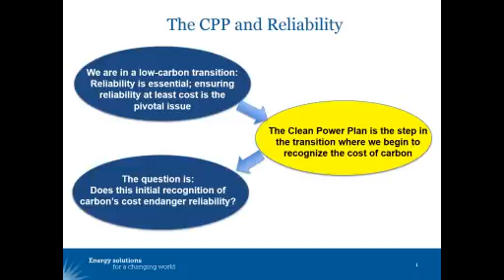This is Christopher James with the Regulatory Assistance Project. Carl Linvill, also a principal, will be the presenter for today's webinar on countering the reliability card.

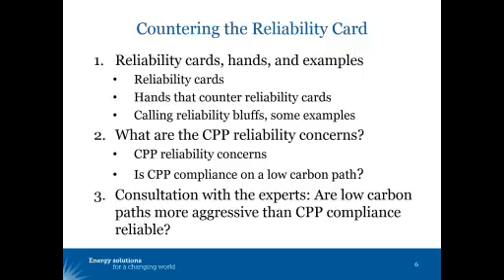So first, to step back on reliability, I like this slide a lot, and I hope you'll hang on to it and use it. One of the first challenges you face when somebody plays a reliability card is, well, what do they really mean by reliability? Some people will claim that closing a power plant or some number of power plants compromises reliability in and of itself. Well, that's not per se a reliability issue.

Reliability issues are things like, is the supply adequate to meet demand? Those are adequacy concerns. Does the system operate well under normal operating conditions? Is it able to adjust supply and demand to keep balance and keep frequency in normal operating conditions? And does it respond really well when a disturbance hits the system?

If reliability is protected under all three of those circumstances, as being adequate for planning purposes, as operating reliably in normal operating conditions, and in meeting those disturbances in unusual conditions where stress is placed upon the system, then that system is said to be reliable.

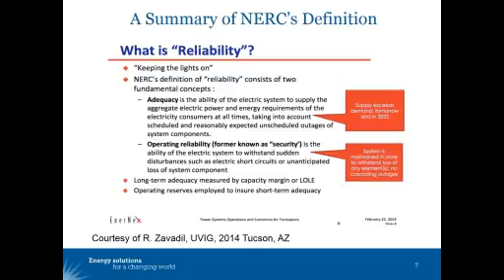So I have these things listed here on this slide. I just want to point out that this grouping of things was recommended by Brian Parsons, formerly with National Renewable Energy Lab and now with Western Grid Group. And there's some really fine presentations by Debra Lew, also formerly with NREL, now with General Electric, that you can find on the Western Interstate website. And I will post how you get to those after this presentation.

So the first step in countering a reliability card is figuring out what card is being played and getting specific about that. The second piece in countering the reliability card is to think about what hands you have that may be appropriate for countering the card being played. It depends on the resources available. It depends on the flexibility that already exists in the electric system. It depends upon what changes in operational practices can be feasibly implemented.

But no matter what location you're in, it's almost surely true that there are a number of hands that can be played. There's one point I want to make at this point. I'm giving you a broad overview. Different electric systems in the country are different, and a necessary part of countering the reliability card well and figuring out what hand to play in your region is to get to know your friendly local electric engineer and system planners. There's some good people in every location around the country that can help you to interpret this stuff for your specific circumstances.

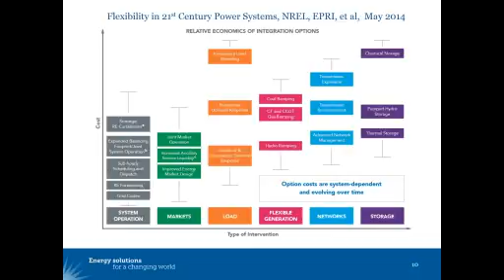We certainly will do our best as well, but at the end of the day, one of the most effective things that I've seen utilities do is take advantage of a lack of knowledge of their specific system by a technical expert. And so vetting what you plan to say and what you're going to do with someone who really knows your electric system well is a really good thing to do.

So there's this nice chart. There have been many things like this that have been created over the last several years. This one was taken from a publication called Flexibility in the 21st Century Power System from last year. It's an NREL publication. I included it partly because it's notable that a co-author on this is EPRI, who has good credentials on the utility side of the community. So I think it's a good one to pull out to show the range of tools that are in the toolbox.

There are tools here, system operation tools, tools that relate to the supply side, both fossil resource tools as well as renewable energy, large-scale renewable energy tools. And then, of course, there's the customer side, the customer resource side of tools that are available, like demand response, local storage, local generation, things like that. There's also changes in market design that can be useful. So there's a wide range of tools.

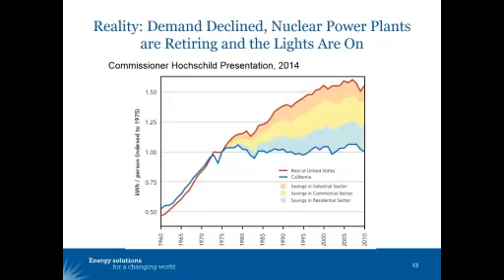This inspired quite a response. And what we saw was that 40 nuclear power plants were not needed, not anywhere close to 40 nuclear power plants were needed. And in fact, California set out on a path of controlling load growth, as many other places in the country did as well, to where this projected doubling every 8 to 10 years was confounded and did not turn out. So the lights stayed on. 40 nuclear power plants were not built. There's only a couple of nuclear power plants left operating in California today. The lights are staying on today. Boy, was that one wrong.

Now, another one, and this is one that I personally confronted when I was a commissioner in Nevada: our utility at that time, in the early 2000s, about 2004, was asserting that the most wind that could be accommodated in northern Nevada was 50 megawatts. And going beyond 50 megawatts would require a substantial investment in additional firming generation. 50 megawatts on a 2,000 megawatt system is about 2.5% of load. If you do the energy calculation, it's about 1 to 1.5% of the energy.

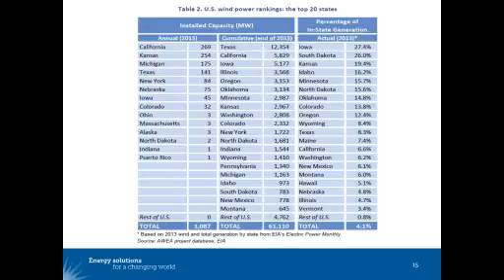We've seen since that time that installed capacities are quite a bit larger than 1.5 or 1% of generation. Certainly not everywhere, but the lights are staying on in all of these places that are listed on this chart here. And here we are seeing penetrations much larger than those very low levels. There are lots of examples that we could go on and on with.

One that comes up in a number of places with the net metering conversation right now is fear about distributed generation penetration levels that are very low. In places where there's essentially no distributed generation, the utility or others will sometimes say, well, we can't keep net metering, or we can't allow distributed generation to run wild because it'll compromise reliability. We found that even the 15% limit on any circuit that was in IEEE's former interconnection standard, that's being updated and already has been updated in California, was far too modest. And there are others that we list here as well, and I'm sure you could come up with others, and I encourage you to do that.

I don't want to say that reliability is not vital. Reliability is vital. It's a matter of public health and safety. Reliability limits do exist that need to be paid attention to, and they are location specific. So again, the advice about being friends with your local electrical engineer, power system engineer, experts is very important. But the reality is that playing the card, playing the assertion, has not always manifested itself as a problem, and in some cases, as we've just discussed, it's been dramatically wrong.

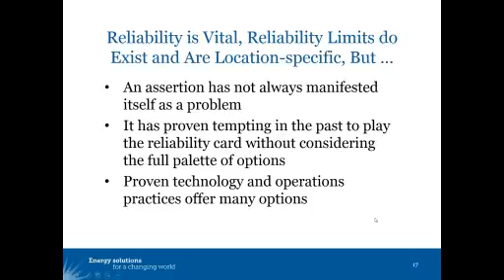So let's start talking about the Clean Power Plan here for a minute. What have we heard being asserted relative to the Clean Power Plan? Well, the issues in FERC's National Technical Conference, scheduled for next week on the 19th, they posed a number of questions. They chose these three categories for the questions. And they asked people to comment, does the Clean Power Plan impose operational issues? Does it affect infrastructure investment? And does it cause market issues?

From the outset, the one thing that's kind of troubling about all of these questions, they did not use the word problems, they used the word issues, but there certainly is a connotation of an issue being a problem. As the quote that Chris read early on stated from Michigan, this is not only a potential issue area or problem area, this is also an opportunity.

Most conventional generation is approaching the end of its operating life in this country. There's going to be a large investment in new generation, no matter which future we follow going forward. This is an opportunity to make smart operational choices, smart investment choices, to build the right infrastructure, to build the right facilitating market mechanisms like those that allow customer resources to fairly participate. This is an opportunity. It's not just an issue or a problem or a threat.

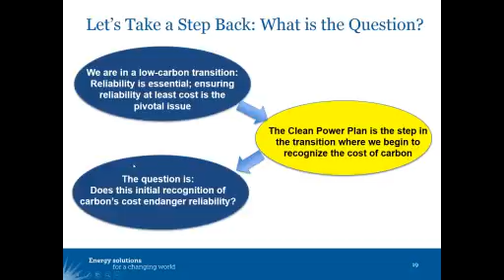Well, let's take a step back and look at this question. We're already in a low carbon transition. Everywhere regulators acknowledge reliability is essential. And the real question is, how are we going to ensure reliability at least cost? I want to say that the Clean Power Plan is just a modest step in the transition where we're beginning to recognize the cost of carbon on existing power plants. So the real question, I think, is, does this initial recognition of carbon's cost endanger reliability?

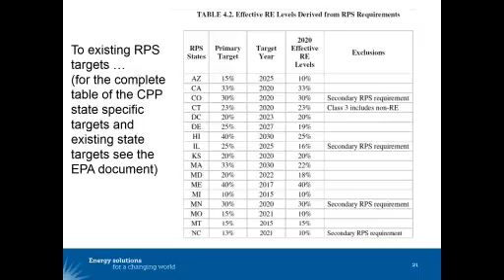This is a nice little technical report from the Western Electricity Coordinating Council staff. This is a preliminary report, which means that it was prepared by staff. It's not been adopted by the board of directors of the Western Electricity Coordinating Council. But you can pull out some information that just comes out of data that are in the plan, and we can contrast what RPS targets we see in different states in the WECC planning numbers relative to what EPA is incorporating into their building blocks.

So this is just another look at that data we looked at a minute ago. And you can see, again, that in most of these places, with a couple of exceptions, these RPS targets are at or exceed the EPA targets, or EPA assumptions.

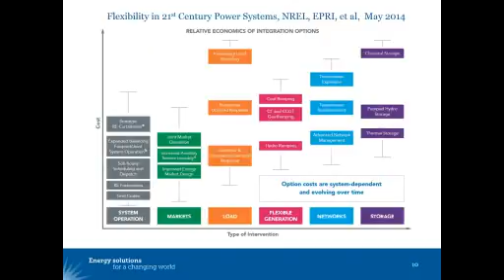Chris, are there any questions? Yes, Carl. I received two questions that I guess you can decide whether they're clarifying or maybe hold, but they both relate to slide number 10. And the questions are, one is, if storage is so expensive, why is it receiving so much attention? And then the second question on the same slide is, what is the significance of the order of options shown? Both the order of the intervention and what's described in each. Is there any significance to that? Okay.

Yeah, those are good questions. I'll take the second one first. So these are ordered by range of costs, right? So changes in system operations that don't require investment in new equipment or substantial investments can be very low-cost modifications. And you'll notice that each of these things has a wide bar. And so it's not that things from the storage bar might not be cost effective. They may be the right solution for the situation that you're facing. And you can see that the lower part of that storage bar is not as low as basically no cost operational improvements, but can be competitive with some operational improvements.

So, the significance of the order going across is just, I think, this is an NREL document. I think they were ordering it in a way to emphasize the lowest cost, basically the low-hanging fruit things that can be done first, and proceeded to the right. But as I said, the bars are also significant. The distance from the bottom to the top of the cost is significant. And while something like storage may look like the most expensive option, it may be the right option for the reliability challenge that you face. Finally, with regard to storage being expensive, the cost of storage is coming down. It may be, in some places, the least cost tool.

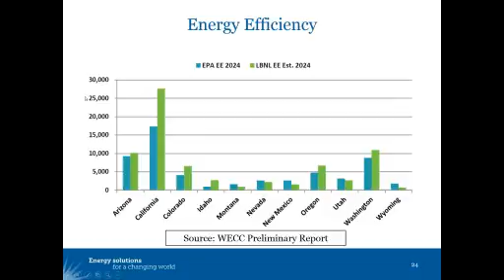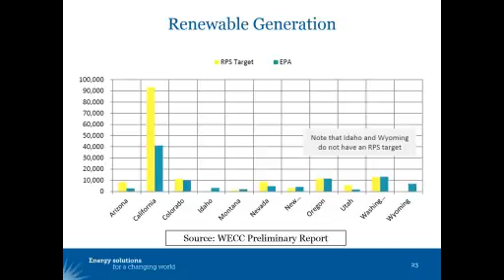So I would say these are actually in gigawatt hours, so California's energy efficiency goal would be about 27 terawatt hours. Yeah, I think that's probably correct. And California's renewable goal would be 92 terawatt hours. That sounds in the ballpark to me. Okay.

Anything else, Chris, or should we move on? You can move on. Okay, great.

And so, it's interesting to see. What I intend to establish in this part of the presentation that we're just now leaving is that the Clean Power Plan is just on a path towards meeting many of the targets that are already in place. And the next question might be, well, how high can we go? What renewable energy levels can be attained without significant reliability problems? The purpose of this question is to establish that, again, these Clean Power Plan goals are really modest goals.

And that a number of studies by highly qualified folks have found that much higher renewable energy penetration levels can be reliably incorporated in the system. There's a citation to a study that we did about a year ago, Clean Keeps the Lights On, that provides a little bit more detail about the studies that I am going to review here. So I encourage you to look at that if you have more questions.

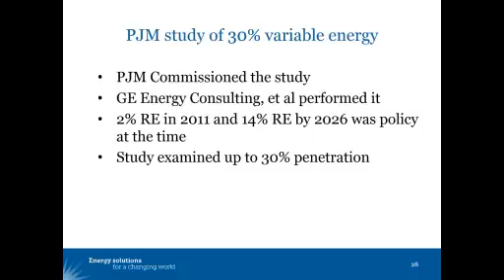And this is a direct quote taken from the study. The study findings indicate that the PJM system, with adequate transmission expansion and additional regulating reserves, will not have any significant issues operating up to 30% of its energy provided by wind and solar generation. So reliability is not a question. Some expenses may be required. They note the need for some additional transmission and some additional regulating reserves. There are different ways of getting those regulating reserves, as the chart of options up above noted.

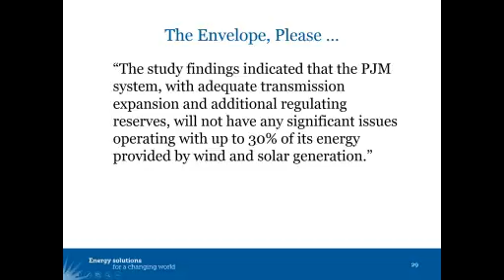So, for example, storage is available as an option for getting regulating reserves. There's a really good publication by NREL on wind energy with active controls that makes it clear that wind energy can be used to provide many system services that help to support reliability. So yes, some investment may be necessary, but there aren't any significant reliability issues, up to 30% provided by wind and solar.

Second study I want to talk about briefly was commissioned by Texas Clean Energy Coalition. Some 2032 scenarios were prepared by the Brattle Group. Texas has more than 12,000 megawatts of wind today. The study examined wind expansions from 4 to 46,000 megawatts, solar expansions from 6 to 13,000 megawatts, and gas expansions from 50 to 65,000 megawatts. The coal fleet in these scenarios ranged from not changing to an 80% reduction in the energy coming from coal generation.

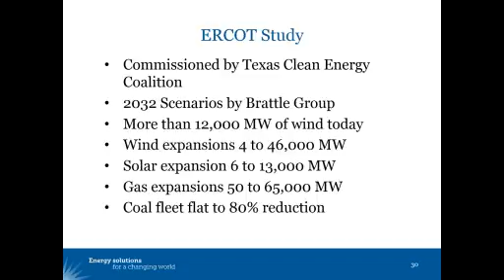The study conclusion was, our models found no technical difficulties accommodating much higher levels of variable wind and solar energy while fully preserving reliability. Now, there may be other ways to fully preserve reliability than relying on as much gas as we relied on in this study. But I think the overall point that you can achieve reliability with much higher penetrations of wind and solar is an important one.

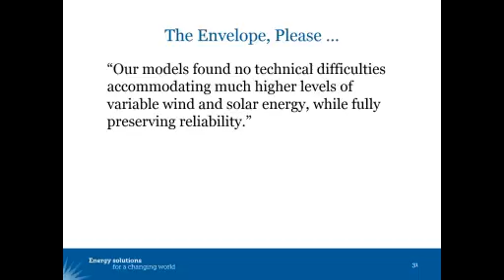The Western Wind and Solar Integration Study was commissioned by NREL, performed by NREL, GE Energy Solutions, and others. They had help from others. They looked at 35% penetration of wind and solar in what's called the WestConnect footprint, which is the southwestern and on through Colorado footprint. And this is a statement taken from that study.

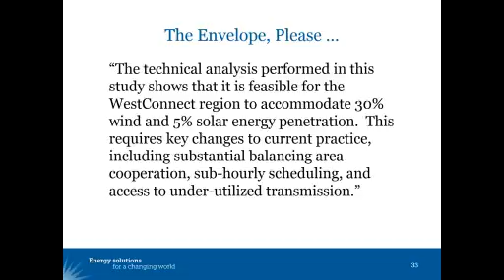The technical analysis performed in this study shows that it's feasible for the WestConnect region to accommodate 30% wind and 5% solar energy penetration. This requires key changes to current practice, including substantial balancing area cooperation, sub-hourly scheduling, and access to underutilized transmission. So their proposal for the pieces of the toolbox that are needed to accommodate these 35% levels come from that left-hand category of stuff having to do with evolution in operations practices.

There are many more studies that have found similar conclusions. The Minnesota Renewable Energy Integration and Transmission Study looked at 40% renewable energy in Minnesota and found that reliability could be maintained at 40% renewable energy penetration. The National Renewable Energy Lab is a part of something called the Low Carbon Grid Study and did perform something called the Renewable Energy Futures Study. Both studies look at much higher penetrations of renewable energy, higher than 40%, and the Renewable Energy Futures Study, as you're probably familiar with, looked up to 80%.

Now, when you get to some threshold, there are investments required. You become dependent on making some of those changes that are in the toolbox that were described on whatever slide that was, slide 10, I think it was. But again, these studies are finding that reliability can be maintained with much higher penetrations of renewable energy.

The 2050 roadmap for the EU, similarly, the Eastern Wind Integration and Transmission Study. E3's study, beyond 33% in California, found that very modest curtailment would be experienced at 40% renewable energy penetration. Low Carbon Grid Study believes that even less of an issue arises going to 40 to 51% in California.

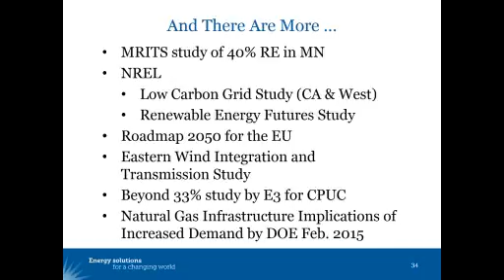And then just recently, actually in February of this year, the U.S. Department of Energy commissioned a study that looked at the natural gas infrastructure implications of increased demands, both from generation and from use of natural gas, with prices being much lower today, and identified that the investments necessary to ensure adequate supply of natural gas being delivered to where it's needed call for investments that are below historical levels. So in other words, the annual investment for the next 10 years of building the system to accommodate whatever increased use is necessary requires expenditures that are below historical averages, which is very interesting.

So to wrap up, I hope what we've shown is that reliability is a legitimate issue. It should not be dismissed. It should be taken very seriously. It should be considered as a local issue. So these studies are wonderful for showing that in different places of the country, we're finding high penetrations can be achieved. But you also have to tailor those messages to your local situation, interact with some folks that are very familiar with your local situation.

These hands that are available to counter the reliability card are numerous, as the chart on page 10 showed. Putting together the right cards to play first requires that you get clarity from the entity in question, whether it's a utility, a balancing area operator, or an RTO operator of a system. So you get clarity from them on what exactly is the reliability issue that's at stake. What are the problems that are being asserted in a more specific way, and then tailor your response to those cards that can help to counteract that issue.

The Clean Power Plan is just an initial recognition of carbon's cost. It's a modest recognition, and in many states, policy requirements already have states on a path that is more aggressive than the Clean Power Plan. And finally, Clean Power Plan targets are modest compared to what highly respected experts like the Brattle Group, GE Energy Solutions, and the National Renewable Energy Lab have found are possible without compromising reliability.

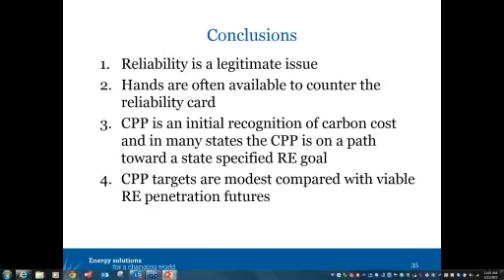Great, thanks, Chris. So again, the... okay. Again,

I have a fundamental issue with the way that this discussion about reliability and the Clean Power Plan is being framed. I think it's very important that we remember that we're already in a low-carbon transition. Everyone acknowledges reliability is essential, and everyone is seeking to figure out how to ensure reliability at least cost as we make our way through the low-carbon transition. The Clean Power Plan is just a very modest step in the transition, where we begin to recognize the cost of carbon associated with existing power plants.

And what we've shown in this webinar is, in fact, that modest step towards a low-carbon future does not appear to compromise reliability. It's more modest in many places than state goals that are already being implemented. It's far more modest than studies produced by some of the best technical minds in the country have shown can be achieved reliably. So I don't believe that this initial recognition of carbon's cost endangers reliability.

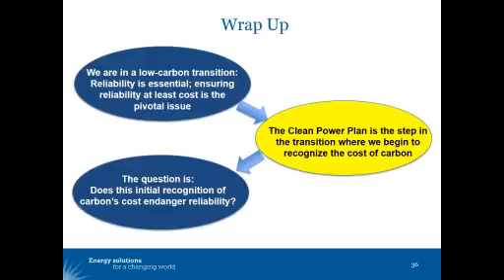Oh, yeah. So, hopefully I answer your question, and if I don't, then feel free to ask another one. But yeah, regional cooperation is an outstanding strategy. I'm going to bring up slide 10 again here, because I think it's good for people to look at. Some of these measures which make the system more reliable are in fact directly connected to the size of the footprint of the system. The point I was just making in responding to the duck curve, but also in responding to many reliability challenges, there's an opportunity to take advantage of regional resources.

And so building regional capabilities that allow states to share resources, to purchase resources from each other. Things like, in the West, the energy imbalance market has been helpful in intra-hour exchanges between PacifiCorp and the California ISO. So yes, larger balancing areas is a great thing.

More balancing areas, larger footprint is a great way to accommodate more renewables, both because renewables are complementary in different places, so you can use that complementarity to reach higher renewable penetrations, and also, to the extent you have shortages in certain system services at particular points in time, you can draw upon that larger pool to meet those without having to undertake more local investment.

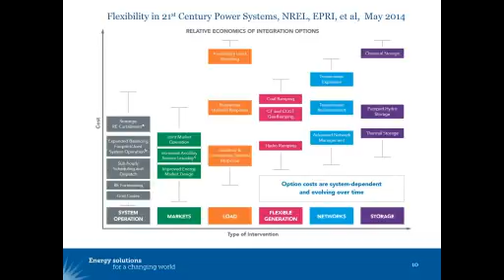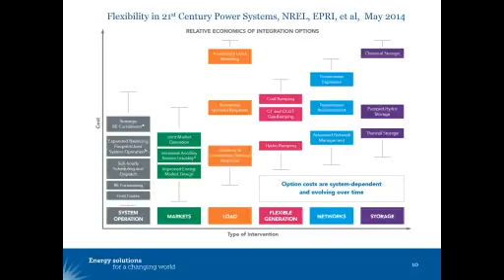Well, recall that the PJM study was talking about reaching 30% renewables, which is not the target that's built into the Clean Power Plan for PJM. I don't know what the implicit target for PJM is in this list, but it looks like it's at most 25%. So the first question is how much transmission is in fact really needed to comply with the Clean Power Plan, assuming that there is transmission needed.

Assuming that there is uncertainty over the timing of that transmission, where you're short resources, I think the best strategy is to call upon customer resources to the maximum extent possible in that interim period to cover whatever short-term deficiency might arise from a transmission line being delayed. We know from studies done by the non-wires roundtable in the Northwest that it's not uncommon to find local resource responses that can defer the need for transmission by a few years.

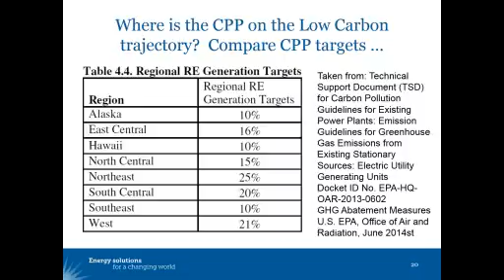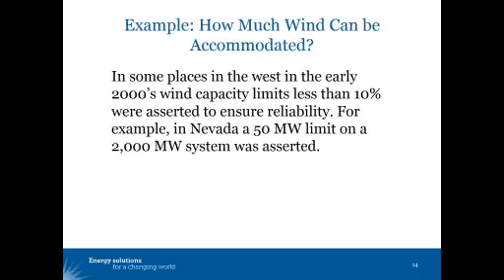I'll give you a couple of the metrics. I can't answer off the top of my head. I myself am not an engineer, so you're stepping into an area that I'm less comfortable in. But I would say generally that, as far as a reliability metric, systems have established planning reserve margins that are based upon some planning standard, like 1 outage in 10 years, or 1 day in 10 years, or 1 event in 10 years, something like that standard, which leads to the development of a planning reserve number.

An interesting study done by the Brattle Group in PJM recently found that those planning reserves, and 15% used to be a common number used for a planning reserve. If you had 15% planning reserves, then you're reliable. And some say that, with more variable energy on the system, we need a higher planning reserve because we can't really, quote unquote, count on those resources. So there's 2 metric sides to this question.